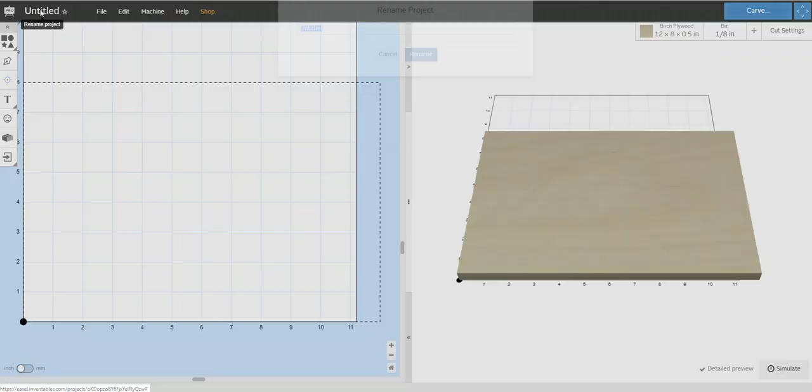Alright, so Easel, when you open a new file you got untitled, right? So let's name it... Square. Actually, yeah, Square. Alright, so name your piece first. It auto saves, and you can set it as a favorite, which will have it show up in another area when you're searching for it.

Alright, file, you can make a copy - I use that a lot. You can import, download zip files, share it, publish it.

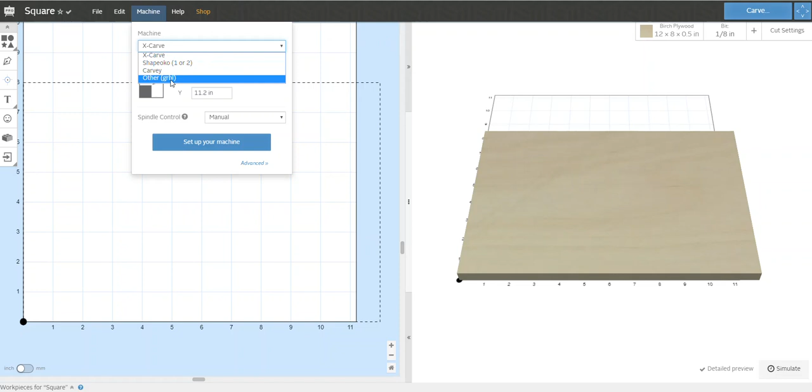You can edit it. This is where you would, if you were carving through Easel - depending on the machine you're using, if you're using X-Carve then you can use Easel to carve right out of there. If you're using some other CNC that runs on GRBL, you're better off using UGS. I wouldn't cut out of Easel.

And then obviously you have the help section, and then you can shop things through their site.

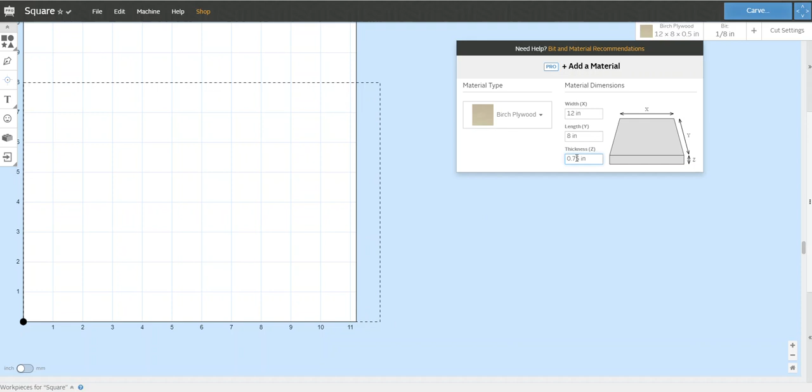On the right side here, you got your size of your wood. See if we got 12 by 8 inches, half-inch plywood, and our dotted reference points are right at that size. So if I was using pine like I normally buy, it's 3/4 inches thick - you just want to change that thickness.

And then you have your bit selection here. You can select these bits, and it'll give you a nice reference of what it looks like.

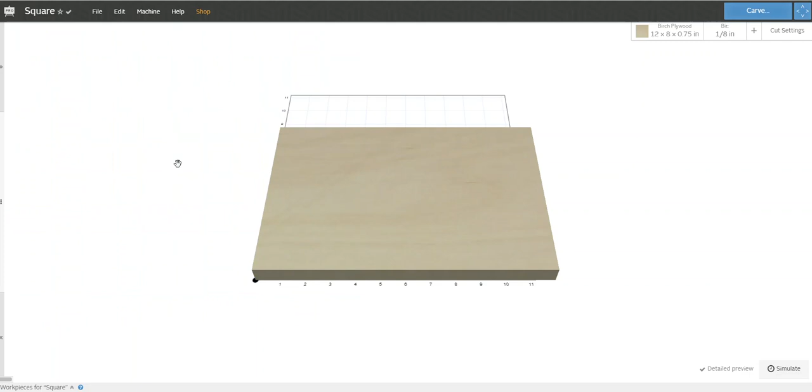Got a couple toggles over here. So if I want to just look at the art area, I can hit that arrow. If I want to just look at the finished product, I can hit the other arrow. And if I want to look at both, I can drag the middle over. When you first open Easel, it's going to look like this anyway, so my apologies for not adjusting that at the beginning.

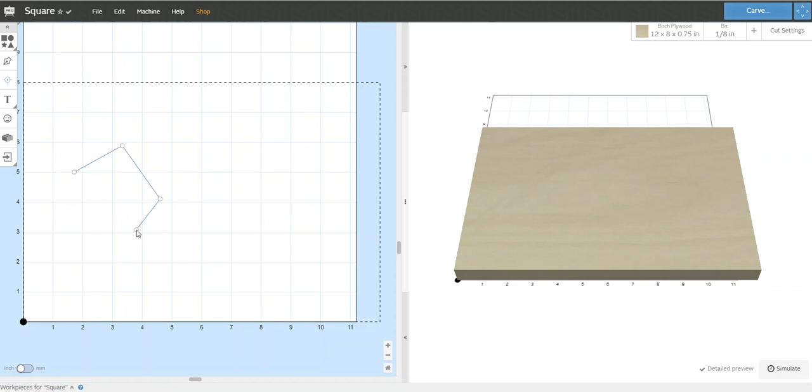You have shapes here, line tool - so if you're doing some trace work you can use the line tool. I can do all kinds of stuff here, and then you'll notice it shows up here, right? It's highlighted, and I can hit delete.

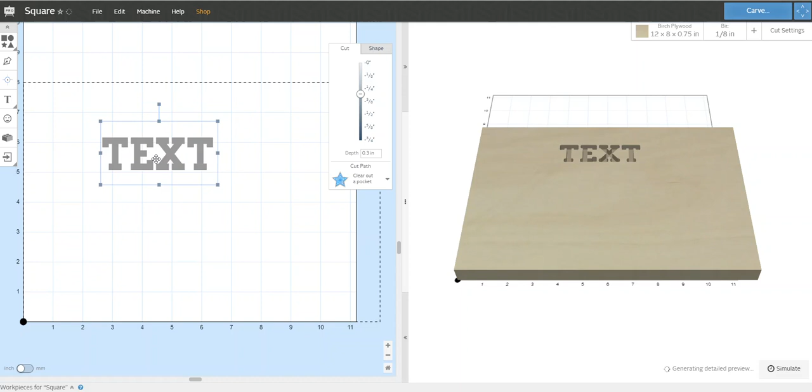Text box - you got all different kinds of fonts. You can add fonts if you're a Pro user. You can drag it around, and while I'm clicking there I can type as much as I want. Right, you can size it up.

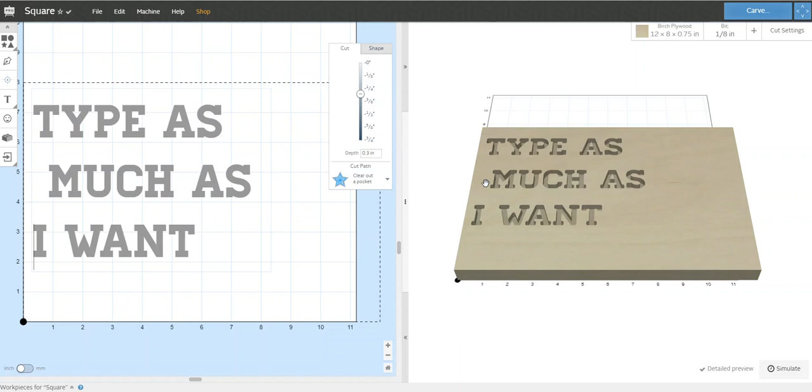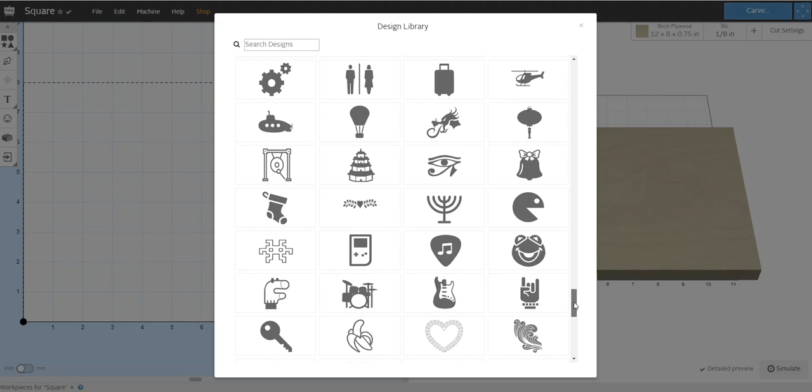Highlight that, delete it. You got all kinds of pre-set up designs. This looks like this database grows - there's a lot of things in here now that I don't remember seeing before. So these are all free files here. All you do is just click on them, right? Click on the cow - there's the cow, right?

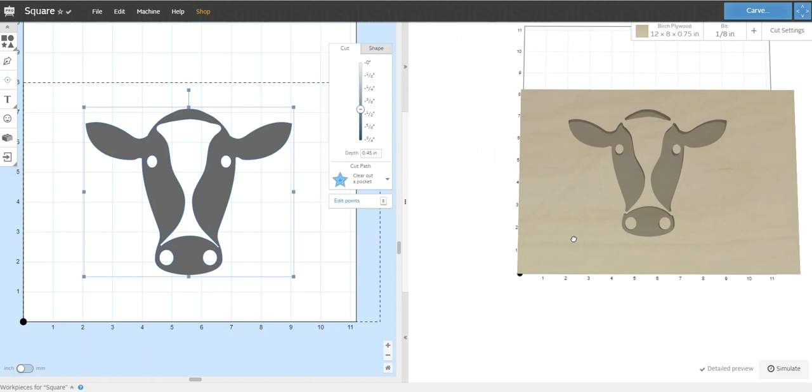On your design simulation area, if you hold the left mouse you can move the piece around, kind of get an idea how deep it's going. If I hold the right mouse button, I can move the piece like that. And then obviously you can zoom in on it.

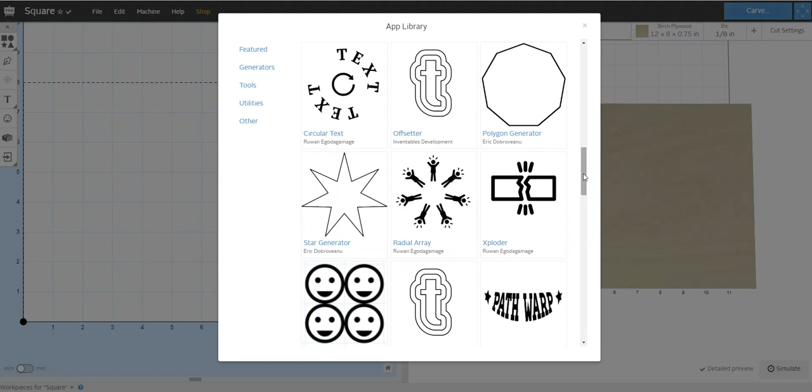Then you've got some apps in the app library, which have generators, tools, box makers, inlay generators. A lot of these you need to have something on the left side design area in order to even utilize the app - keyhole generator. I'm not going to get into any of that stuff.

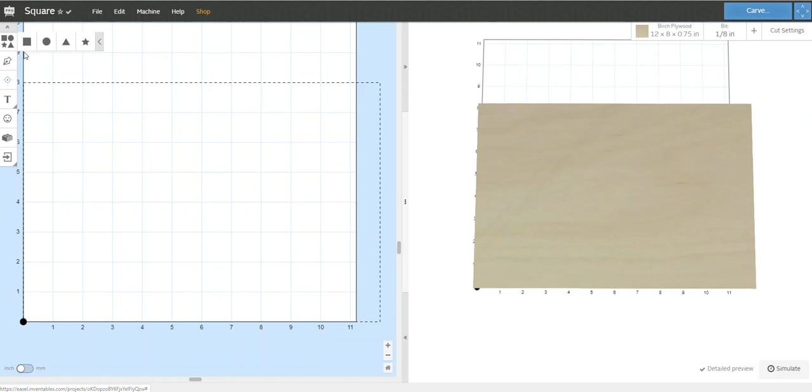And then upload - you can trace images, import DXF files, G-code and SVG files. But for the purpose of today, we're just going to do a square, right? So we're just going to use the shape maker. Click on square, and there's our square, right?